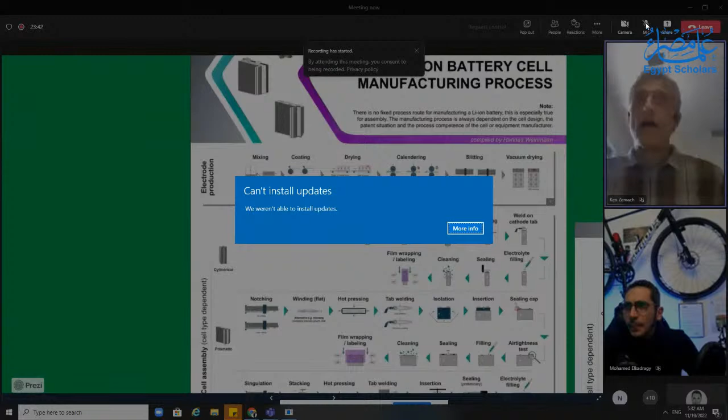Okay, so actually, let me ask you a question. Is everyone on this call probably read in enough on battery manufacturing that they know what an anode and a cathode is? Because I can explain it pretty quickly. You can do this, feel free to do it.

Okay, so you all know that a battery, you can charge it and you can discharge it. And I'm speaking in generalities, so there's always exceptions to what I'm going to say. But in general, take what I'm saying as faith. There are exceptions, so some things I say won't be exactly accurate. So a battery cell, think about your little... I wish I had one.

Maybe, let me, hold on. Okay, no, I can't. I was looking for like a little AA battery cell, right? And there's a little dot on the top that's the positive, and then the whole can that's covered is negative. Yeah, negative what? You know what, you don't need to be an electrical engineer. There's two sides. There's a positive side, there's what we call by convention the positive side, which is going to be the cathode, and the negative side, which we're going to call the anode.

And new people mix this up. Well, here's your way to remember that: some people like cats. If you like cats, you're positive about them. Therefore, the cathode is the positive electrode. That's a very nice way to remember it. Because even me, I used to make them for a long time, but then I had to remember it in a certain way, that cathode is the positive and anode is the negative. Yes, but this is a nice way. I'm not saying you have to like cats, but some people like cats. I like cats. And if you like cats, then you're positive about them. That's the positive electrode. The anode is the other one, so it must be the negative.

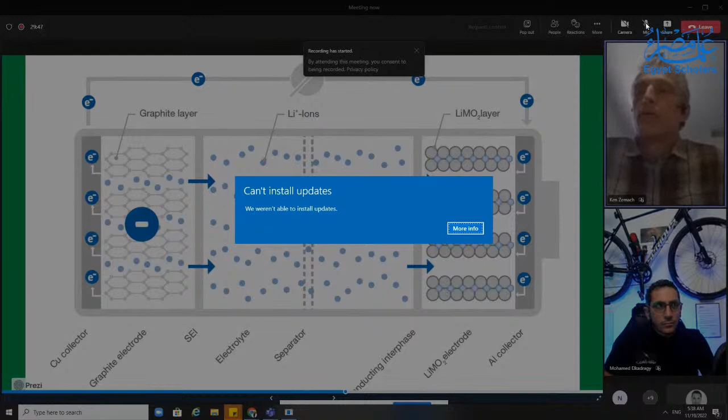So you have something in between called a separator, which you can see in the middle. A separator is usually microporous, meaning little tiny tortuous holes in plastic—usually polyethylene or polypropylene. It's plastic because that electrically isolates the cathode from the anode. So you have cathode, separator, and anode. You can squeeze those together and the cathode doesn't short circuit to the anode.

But the lithium ions can't just hop through air, so you usually put in an electrolyte. In the majority of cases, the electrolyte is a liquid, an ionic liquid. If you look up electrolyte safety data sheets, you'll see about 5 different ingredients, but there's usually like 12 because there's a bunch of trade secrets. It's a mixture of organic solvents.

Why do I say that? I'm not expecting you to know what an organic solvent is. Organic solvents are flammable—gasoline is organic, and gasoline burns. Organic solvents in general are flammable. Polyethylene is a plastic—think of it as frozen gasoline. It'll also burn, just not quite as explosive as gasoline.

So the electrolyte is primarily usually flammable, depending on the electrolyte you use. And they put some other things called salts in them to help the lithium ions transport back and forth. Think of it like a boat helping ferry people between the anode and the cathode. The salts are the boat, and the water is the organic electrolyte.

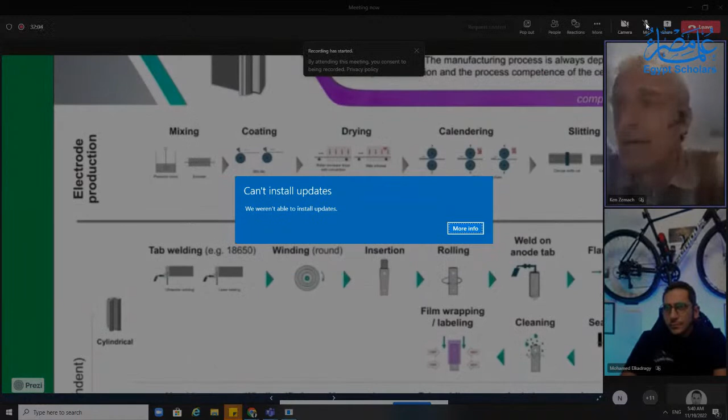So let's go to mixing. The first thing you do, let's take a basic anode. The anode is graphite, a conductive agent—you're talking very little, 0.5% by weight, 1%, maybe 2%—primarily graphite, a conductive agent, and a binder, aka the glue. Standard glue in an anode, and again, always exceptions to this, are carboxymethylcellulose and styrene butadiene, a low molecular rubber. Why two different glues?

Well, it turns out that one of them, the CMC, is good at cohesion, which is gluing the graphite to the graphite, and the SBR, the styrene butadiene, is good at adhesion, gluing that whole thing to the foil—the anode to the copper foil.

But there are other binders and other binder combinations you can use. Remember, you want to use as little binder as possible, because the only thing binder does is glue things together and take up space that doesn't help you with a battery being a battery. So you try to minimize that. You make it too small and you don't get good adhesion, and your electrodes fall apart either immediately or 300 cycles down the road. So there's a big tug of war between minimizing the binder content.

This is where batteries start to get hard. So you say, okay, Ken told me I got three things: graphite, a conductive agent, and binder. Oh, but the binder's really two different binders. So I got four things, and I need to mix them all together. Do I dry mix them? No, I need to put them on something that I can coat. So you use water, and you think, like baking a cake or making bread, just put all the ingredients together and mix them up. Except that doesn't work. You get really bad batteries when you do that.

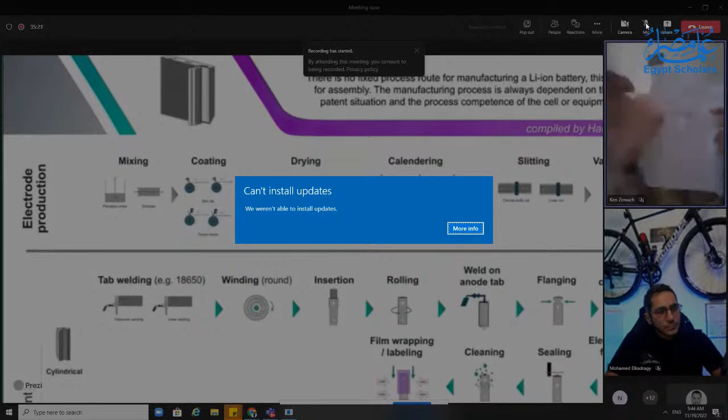Your tests will come out the same. Your viscosity tests, they'll be the same. It looks the same, a big, dark, black, gooey liquid mix, but when you get to the end cell, the performance is totally different because you mixed it in a different order. And you're going to ask why, and I'll say, look, we could go into it, but we'll never get through everything. My point is, yes, there are scientists that figure out this order works for these ingredients, and the workers on the battery line, you should just hand them their instructions and say put this in for this long, and this for this long. But I'm telling you, if those people understand why you put one in first and why you mix for a certain amount of time, your production goes better. It's that human element.

So the next thing you do, now that's the anode. The cathode, I don't want to get too detailed, but electrochemically, in a lithium-ion battery, carboxymethylcellulose and styrene butadiene rubber, those things that were soluble in water, are not electrochemically stable on the cathode side. In other words, they chemically break down because of the electric potential.

So you usually use a fluorinated binder. It's got fluorine on it, which makes it really expensive. But those aren't soluble in water, so now you can't use water as your solvent. The other thing is, if you're making a high-end NMC battery, lithiated nickel manganese cobalt is very reactive with water. So you do this in a dry room. You can't use water for that reason either.

So they usually use NMP, which stands for N-methylpyrrolidone. It's a little unfortunate that NMP sounds like NMC, which is nickel manganese cobalt, but yeah. NMP is a solvent, like diesel fuel, not technically flammable at room temperature. It's a great processing solvent, not very reactive with anything. It has a very low vapor pressure. It's great at suspending various types of particles. It's really wonderful, except it's super hazardous to humans.

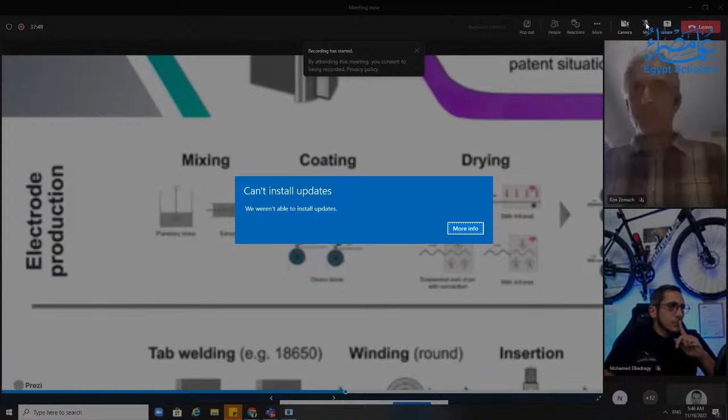Kind of like lead is great for plumbing connections, except it's toxic. Like asbestos is an amazing insulator, but is really bad for your lungs and causes cancer. NMP is an amazing processing solvent, but it's really dangerous. So you've got this really dangerous chemical in your cathode, you've got water in your cathode and in your anode. You've made your slurries, they've got their glue, they're this mixed up goo. Now you're going to coat onto your foil. Anode coats, anode starts with A, coats onto copper. Cathode starts with C, coats onto aluminum.

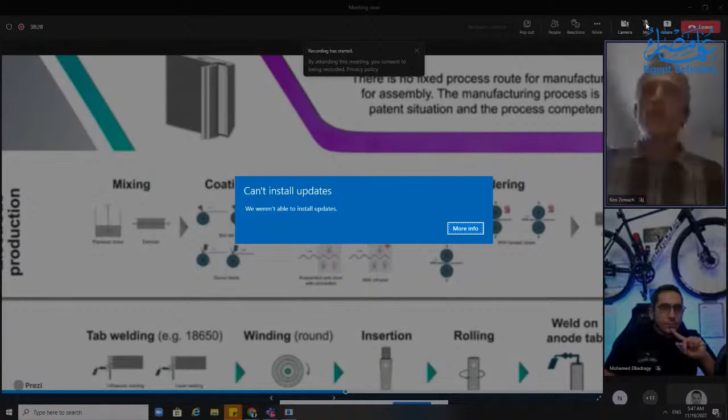There are many different coating techniques, but think of it like this: you have these slot dies, and you pump this fluid out and dispense it while the foil is going through this long system. That system takes the bare foil, wraps it up through, gets coated with a thin layer, and then that gets run through drying ovens, because you need to get rid of the solvent now that you've coated it.

When you're drying the water, you just evaporate it. But when you're drying the NMP, because it's toxic and expensive, you need to recover it. There are different recovery systems—this is millions of dollars in expensive equipment. You recover it and then re-refine it, so now you're running a chemical refinery to refine NMP, which causes birth defects. It's super hazardous to humans, so everyone's wearing face masks and respirator cartridges.

I'm not going to throw out all the problems that happen at every stage, but drying is a great example of how complex this is, and this is where science becomes super important. You think, okay, I've got this wet slurry, I've coated it on this thing, it's got a bunch of binder glue in it. I just need to evaporate off the water in my anode, and then it'll all be stuck together. And the answer is, yeah, that's true.

If you dry it too fast, though, what happens is—think of having this layer of wet electrode goo on your foil. As you're evaporating it, it's only evaporating from the top surface, not through the foil. So you have this transport problem where water molecules are moving up through, and because the binder is dissolved in them, they effectively drag the binder up with it. If you dry your electrode too fast, all of your binder, your CMC and your SBR in this case, when it's finally dry, most of it's up at the surface and not a lot of it's down at the bottom. And if your SBR is moving up to your surface, well, the SBR is what holds your electrode to your foil, so now you're going to have delamination problems.

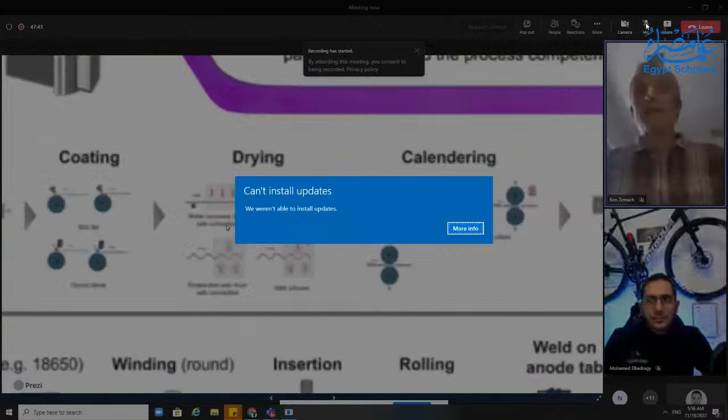The drying's complicated because, as I said, it's called binder migration if you dry too fast. But you can actually dry fast at the beginning when it's really wet, and you can dry fast at the very end when it's all stuck. There's 4 phases of drying, and you can dry at different rates.

So you've got zones in your oven, and you can adjust the different zones, and depending on your foil speed and the length of your oven and what your binders are and what the size of your particles are, you can change your drying. It's super complex. Every stage of this is super complex.

All right, so let's get out of drying. Yeah, because we could spend 2 hours on drying. Literally, I could talk for 2 hours on drying. You don't want to hear about 2 hours of drying. And I'm not trying to scare you by telling you how complex it is.

I'm trying to demonstrate that this is a very complex process. But what that means is there's lots of space for you to become an expert in an area and be super valuable when we get to the career side of this. It's not like you're injection molding a plastic thing where there's 20 million experts out there and you have nothing to bring to the table. No, we have an industry with a super complex set of problems, and you could become an expert in any one of them, or helpful in any one of them. No one person, certainly not me, understands all of these processes well.

Exactly, and this is a very important message, because people think... we will discuss it in the career part, but just a quick comment on it. The mentality, especially that we have in the Middle East, is that some people in general try to understand many things and say, okay, we will be good if we understand many aspects of the thing, how it works. There is the culture of specialization, or having just one aspect to the depth it needed. So someone who's called a drying expert, you will rarely find those people in the Middle East area.

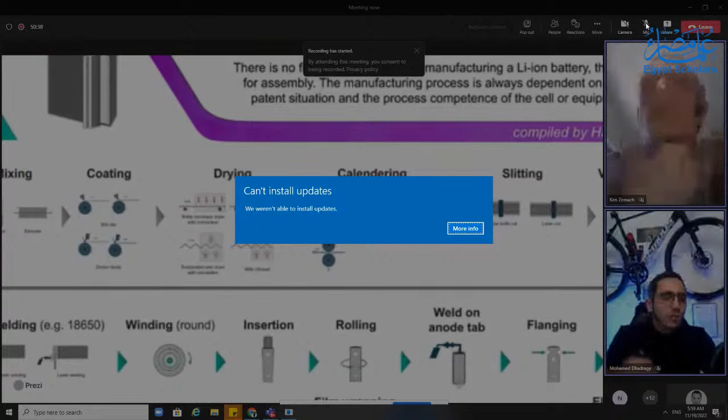Sure. So let me get to calendering. Let's get through this, because otherwise we can go on forever. That's right. Yeah, calendering.

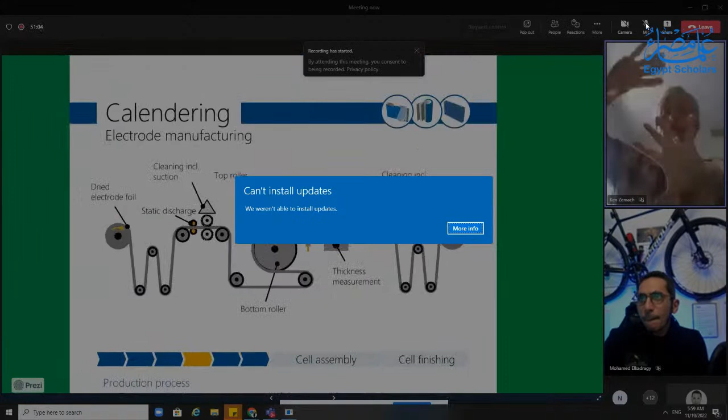Some people call it pressing. Yeah, it's the term people use. I use calendering, other people I've talked to call it pressing. It doesn't matter. It's basically two giant steel rollers that you run the electrode through. Here we have a top roller and a bottom roller. They can be heated, they can be cooled, they can be heated and cooled, they can run at different rates. Generally, you don't do that.

What you're doing is you've coated the electrode, you've dried it, but now there's a lot of pores left over because you basically evaporated out the water. So it's a little too much like a sponge. That's fine if you don't care about high energy density, but if you do want to pack a lot of energy into your cell, you need to control the thickness of those. Calendering is basically crushing it. I mean, these are big rollers. You are pressing the ever-living snot out of this electrode to a certain level of density.

Now you could say, oh well, let's put more energy in my electrode, let's crush it even more. Well, then your pores become too small and you can't get your lithium ions in and out. So there's a balance there. If you crush it less, you get lithium ions going in and out faster, it's faster charge and discharge, but you fit less total energy in your cell.

If you crush it more, now you can pack more electrode in your cell, but your charge and discharge rate, how fast you can charge, how much power you can get out, goes down. So there's a trade-off, and that's all part of the cell design. When you design your cell, that's all considered.

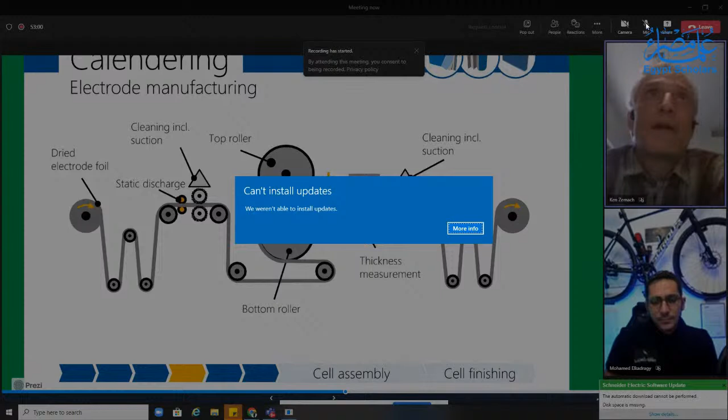So yeah, that's calendering. At the end of that, all of these steps have multiple quality control steps. Beta gauges, looking at thickness, people cutting out little pieces and doing moisture tests to make sure they haven't been exposed to too much moisture, and adhesion tests to make sure your adhesion is good to your foil.

I'm skipping by all of the different quality control steps, which are also all areas of expertise that one of you could become an expert in.

So the slitting, generally this is reasonably accurate. When you're coating, take that lower lane where it says prismatic and cylindrical, and the coating is actually in little lanes. You can do that, or if you're doing prismatic, you might just have one lane, but then the left side would be an electrode and the right side you'd slit down the center. When you're coating these things, if those edges are off, you'll have high edge problems, low edge problems, width problems. All of this needs to be in specification.

How close does it have to be? 0.5 millimeter. You better not be off by more than 0.5 millimeter, or you're in a lot of trouble, and it can actually become a safety issue.

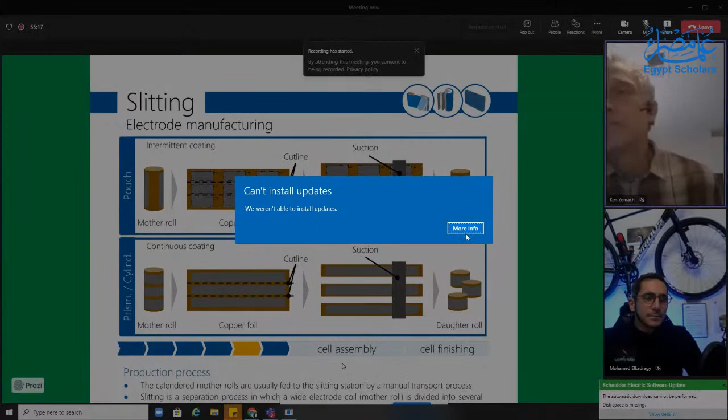So when you're slitting it, there's a little knife blade sticking down, literally slitting this. If your slitter cutting wheel isn't sharp enough, you could get a little metal burr that sticks down, and if that burr sticks down 100 microns - remember, 100 microns is 0.1 millimeter - so if you have a little metal burr that's a tenth of a millimeter long, that is a serious safety problem. You'll probably catch that in formation and aging when your cell catches fire. But really, you don't want that happening.

So we are talking about very exacting tolerances. And you might say, okay, so this goes really slowly - no, it doesn't go really slowly. These things are moving at 20 meters a minute.

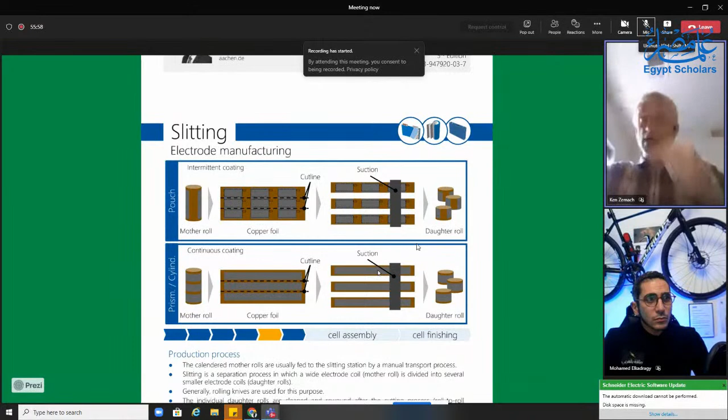And sometimes when you're slitting cylindrical cells, you could have 7 lanes. So 7, 10, 12 of these slitting wheels are slitting, and they're all getting rolled up separately. Every single slitter has to not make a burr bigger than 10 microns, 20 microns - remember, 100 microns is 0.1 millimeter. So you're talking more like a hundredth of a millimeter is really where you'd like to be on your burr size.

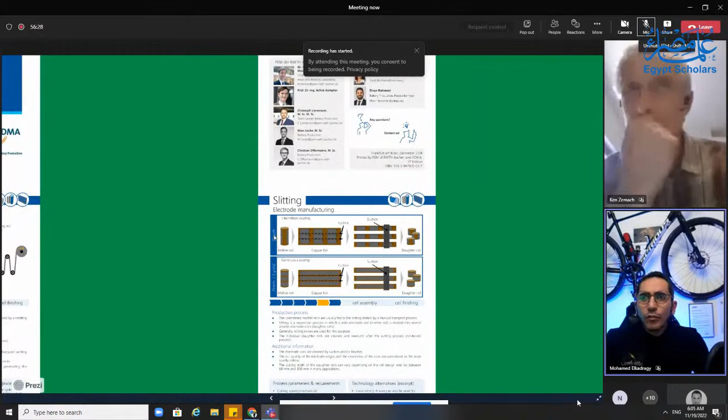I could go on about how hard every step is, but I would just like to give a very quick overview about pouch, prismatic, and cylindrical cells. For anyone who doesn't know what pouch and prismatic are, I have a picture here, and we will jump back to continue.

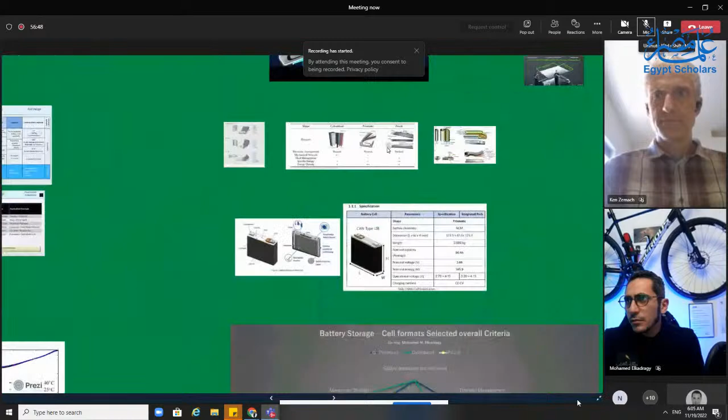So I have a cell format here - I guess I can use this one from the cell formats. So this is basically a pouch cell, the type we have for example in our cell phone. This is a prismatic cell, which is a hard case cell, and this is a cylindrical cell. This is exactly what was mentioned on the other slide - those are the 3 common types which we have for lithium-ion batteries, more or less. I just wanted to show this because it was mentioned here, the 3 aspects, and I will jump back to continue.

So once you've gotten your electrode made, which is the hard part in my opinion, here's an interesting thing: people look at all these steps, and we'll go through the cell assembly steps. When you walk through a lithium-ion manufacturing plant, if you ever get the opportunity, it's fascinating. And it's interesting because everyone seems to think that the cell assembly, from the slitting on, is the hard part.

Cell assembly is really hard, but people all sort of dismiss electrode production because you mix a bunch of stuff together. It looks like black goo. You coat it onto a foil, press it down, slit it. You're like, how hard can it be? But there's all these chemical nuances in there. People can't mentally grasp what's going on at a molecular level, so they don't think it's hard.

When you see cell assembly equipment, you can go watch YouTube videos of stackers, look up a Z-stacking video on YouTube. You'd be like, whoa, that's really complex. The thing is, we as human beings can look at that and visually see how complex it is. So we say cell assembly is really hard. It is hard, but it's not as hard as mixing and coating, because you don't get that visual feedback of what's going on in mixing and coating.

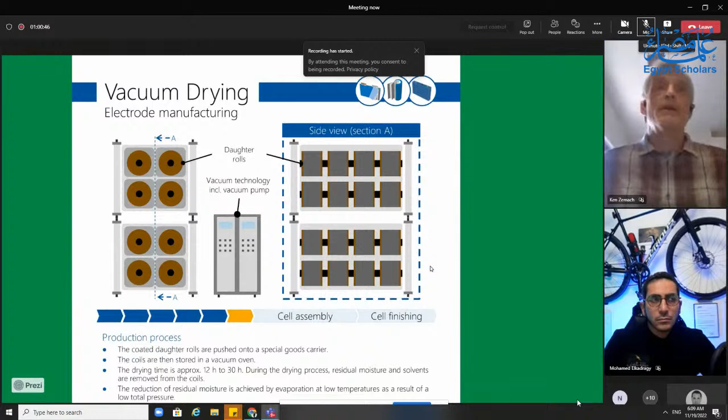So after that we move into cell assembly. Yeah, this cell assembly part will be more meaningful for people, I guess, because this is what they see in videos and so on. I guess I believe so.

Cell assembly: in a cylindrical cell, you take your anode, your cathode, and your separator, and you wind them all so that you have separator between your anode and your cathode. Imagine you're rolling it up like rolling a cigarette or a cigar—it's a spiral with anode, cathode, and separator all wound up.

You've also got to add tabs, because how are you going to connect this stuff? There are exceptions, like Tesla's tabless design, but generally on your electrode foil—copper for the anode or aluminum for the cathode—you will weld on, usually with an ultrasonic weld, a tab, a little piece of metal that sticks out. Then on the anode, that gets bent in on these jelly rolls. They're small, so it gets wound up super tight, all wrapped in separator.

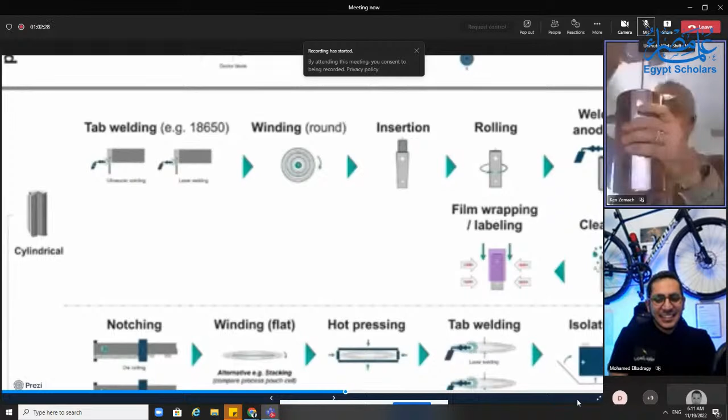Then this gets inserted into a can. So if this is my can and my jelly roll, it would get inserted. But I've got to connect it, so you'll have a stake down the center which welds your anode to your can. On the top, you'll leave it open because you've got to fill it. Eventually you weld your cathode tab to your top cap, which later gets crimped—that tab gets welded to the top cap, which then finally gets inserted and crimped into your cell.

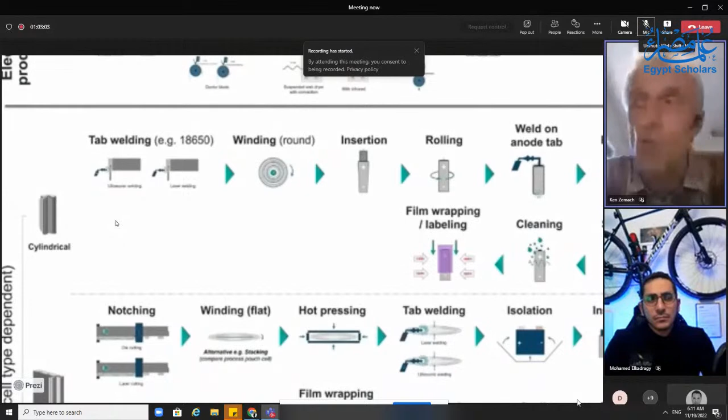Every one of these steps has yield problems: the welding has yield problems, the insertion has yield problems, the winding has yield problems, the alignment of the anode and cathode, the x-ray of the system to make sure your alignment was right—because once you've inserted it, you're blind.

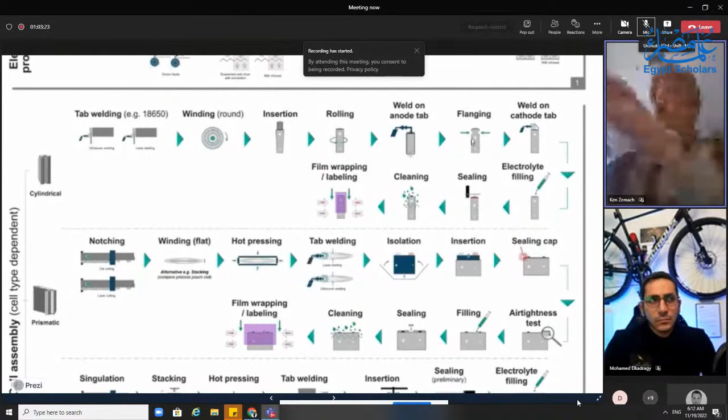Then you do flanging, I suppose. For cylindrical cells, the cap needs to sit on something, so you do grooving or beading or flanging, whatever you want to call it, where they put a little shelf in the can. You come in with something almost like a blade as this thing spins, and you put a little groove in, which is what the cap will sit on.

But before you put your cap in, you need to get electrolyte in. Electrolyte, remember, is this liquid medium by which lithium ions can transport back and forth. They don't just hop through air. Not that there's a lot of air in there, but they do need some transport medium to swim across, basically. So you put in electrolyte.

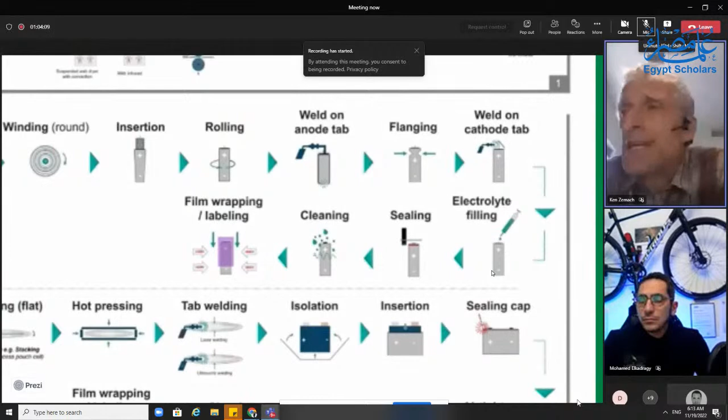Small cylinders are pretty easy. The electrolyte soaks into the anode, the cathode, the separator, because they're all porous. Happens fairly quickly. And then eventually, well, okay, let's leave it at that for now.

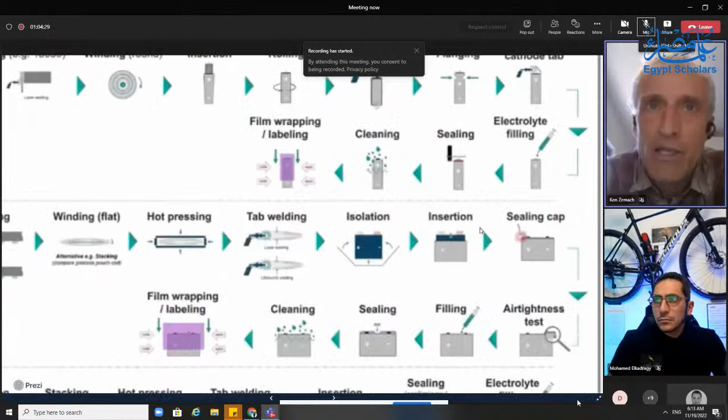For both prismatic and pouch, there are generally two ways in which what we call jelly rolls are made. Before it goes into a can or the final pouch, it's called a jelly roll, probably because cylindricals looked like little rolled up jelly rolls.

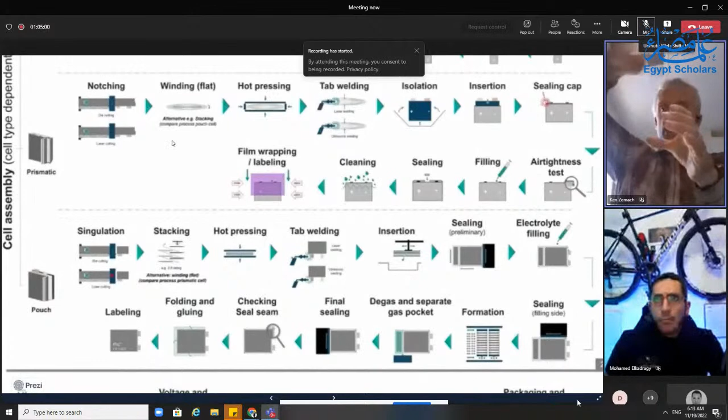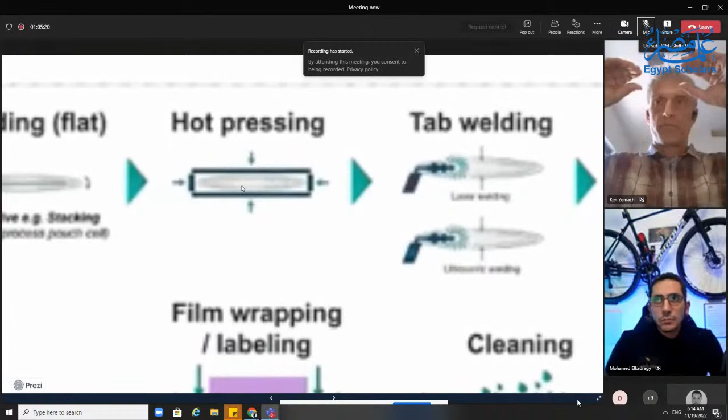One way it's done, here's where it says prismatic, you see it says winding flat. So basically you do the exact same thing: you spin up this wound assembly, and then you flatten it. You smash it down, so if you can zoom in on that hot pressing part, now it's hard to see, but you can see that when you smash it down, it's almost ovally. It's because you've collapsed this thing, it's got rounded edges. That's probably the fastest and easiest way to do it.

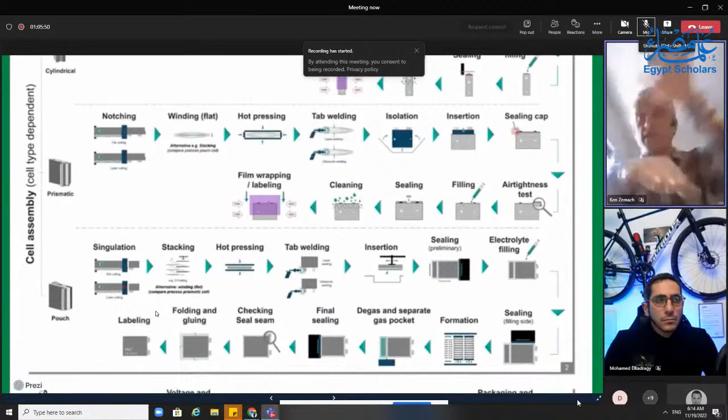The other way that people do it is what you would call stacking. He's got stacking shown by the pouch, but you can do it for prismatic too. There's two different kinds of stacking. You can do Z stacking, where your separator goes back and forth, and you place an anode, place a cathode, place an anode, place a cathode, like building up layers of a sandwich with separator weaving in between. The other way is some people will take discrete sheets: an anode, a sheet of separator, a sheet of cathode, a sheet of separator, and they'll stack the whole thing up like a sandwich.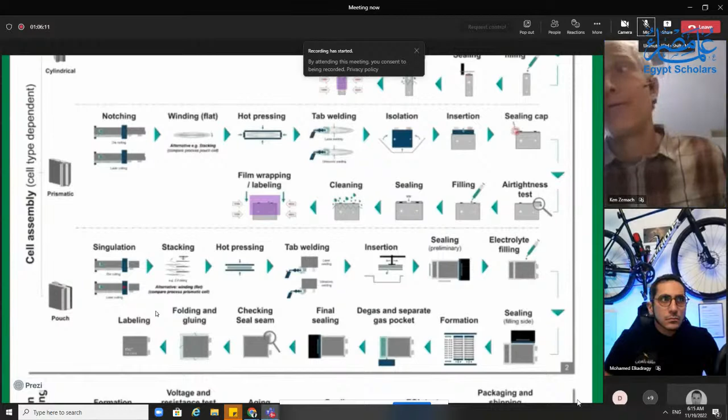Now, how hard can this be? Oh, go watch some videos. Go watch some videos of Z stacking on the internet, and you go, wow, those things are going in really fast. But here, let me go off on a tangent for a moment.

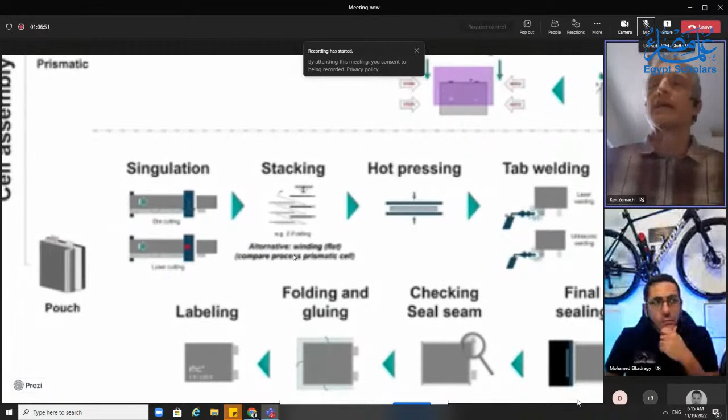You want to maximize the amount of energy in your cell because you're going through the expense of building it. So you want to fill as much of that volume as you can. There's a failure mode that I don't think we'll get into, but basically your anode needs to be bigger than your cathode, both in terms of how many lithium ions it can accept and geometrically—in other words, it needs to overlap.

So if you take a cylindrical lithium ion cell, discharge it, get in a fume hood and unwrap it, you'll see that the width of the long anode is wider than the width of the cathode. And if you take a prismatic cell, or the sheets if you were doing singular sheet stacking, the sheets of the anode are wider and longer than the sheets of the cathode. That is a safety related issue.

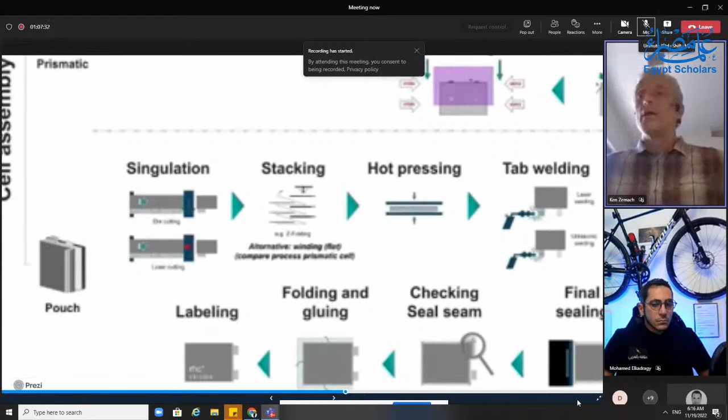And you say, okay, great, so when we stack them, we just need to make sure that everything's centered. You go watch some of those stacking videos and see how fast those sheets get stacked. Now I'm going to tell you that on a not great quality cell, the anode might be 2 millimeters wider than the cathode. So you have maybe plus or minus 0.5 millimeter of alignment on all four sides, corner to corner. And you watch these stacking videos, and it's stacking these things at sheets per second with sub-millimeter alignment accuracy.

Now, it's not done by a person, it's done by automated machinery. But if it gets it wrong, how do you know? Because that's a safety issue. You will know when the cell explodes, I guess.

Oh, wait, have I lost you on audio? No, I was saying that you might know when it's too late, when the cell really explodes. But we can still hear you, Ken.

Uh-oh, I think we lost audio. Can you guys hear me? Say something. Yes, we can hear you. Okay, sorry, I lost audio. Where did you lose me?

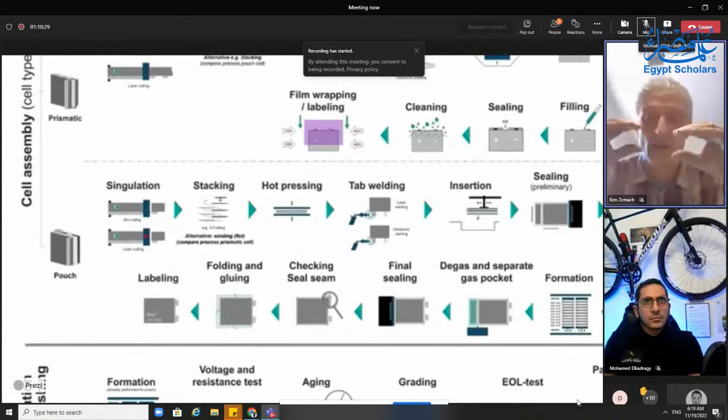So after you've made this jelly roll, sometimes you hot press it to try and get it to all stick together a little bit, but you can't use too high temperature, you can't use too low temperature. It depends what separator you're using. It's very complex. Then you insert it either into a pouch for a pouch cell or into a can, usually an aluminum can. You might need to weld it to a lid first, depending on your design.

And then you need to seal it. In a prismatic cell, you're usually laser welding your lid around the rim of the can. And if it's a pouch, you're doing a heat seal. You're not completely sealing it because now we've caught up with the cylindrical process. Now you need to get that electrolyte in, so you fill your electrolyte.

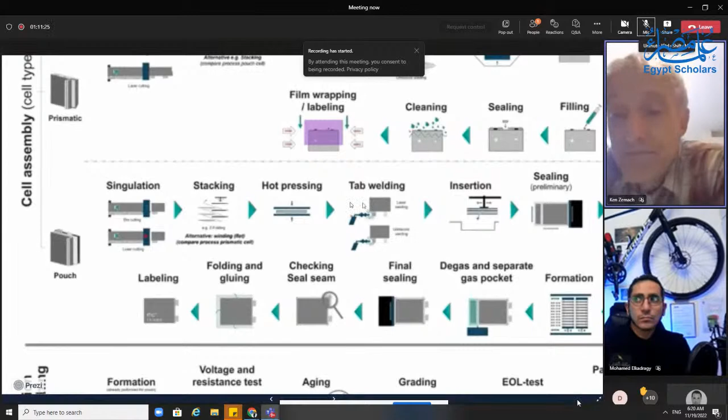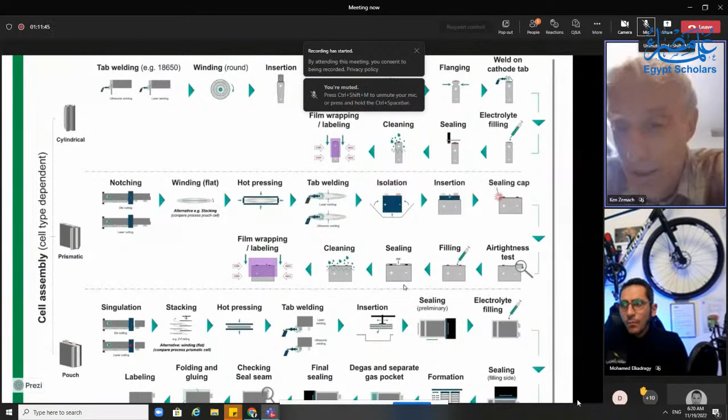Now on a small cylindrical cell, that electrolyte you put in however many grams, 4 grams, 7 grams, depends on the size of your cell. In a giant prismatic cell, like some of these big cells, you've got a tiny little fill hole. So you put in all the electrolyte you can, but you can't get in enough because it hasn't soaked in, because there's a transport problem. This is not like soaking water into a sponge, which by the way also takes time. But imagine you have a giant sponge in a package and you put some water in one part, it's going to take time to soak through.

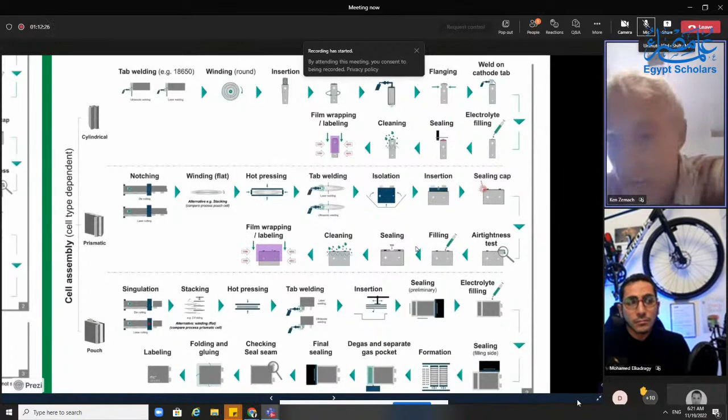And until it soaks through, you have two problems. One, you can't get your electrolyte in, you can't get enough electrolyte in because you need a certain amount. And the other problem: electrolyte filling can sometimes take 30 minutes. You pull a vacuum and then you put pressure, and you pull a vacuum and you put pressure, over and over. But remember, electrolyte is flammable, it's toxic, it's hazardous, and it can't be exposed to water.

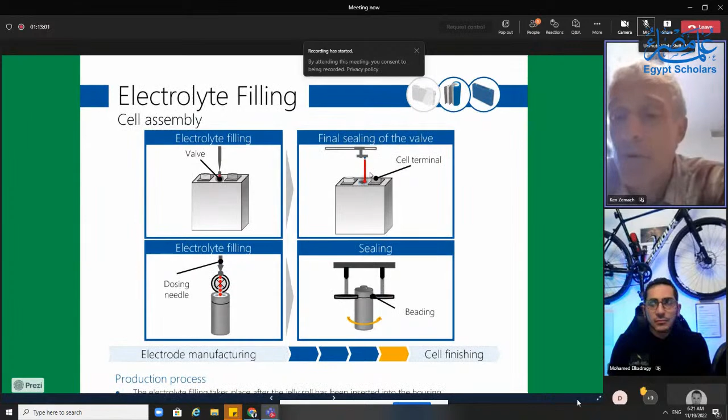So all of this is done in a dry room. So let's pretend you've gotten all the electrolyte that you want in your cylindrical cell, your prismatic cell, or your pouch cell. You say, okay great, now I can seal it up. Nope, you can't. Then usually what you do before the final seal is a pre-charge, where you charge up your cell a little bit. Depending how long, sometimes you charge to a certain lower-than-full voltage, sometimes you go up to full voltage.

And what happens is now you're starting the first formation of the cell. You've got to make sure all the electrolyte's soaked in, so sometimes soaking can take 30 hours. On large cells, you might have to wait 30 hours at an elevated temperature. Then you do this pre-charge, which is like the first stage of formation.

And what happens in that, your electrolyte does some electrochemical degradation on the anode. It creates what we call an SEI layer, a solid electrolyte interphase. Some people call it solid electrolyte interface. I think interphase is the correct term, but people use them interchangeably. There's no standard. This SEI layer happens, you can't stop it, but it also turns out to be a protective mechanism. But when an SEI is formed, you also get gas given off. It creates gas.

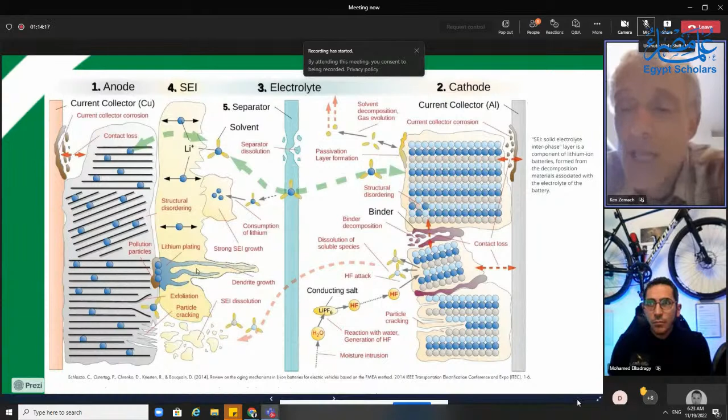The problem is if you fill your cell, seal it up, and then send it directly into formation and aging, that gas will blow up your cell like a balloon. So you have a degassing phase, which is sort of a pre-charge plus putting it under vacuum to pull the majority of the gas off. Then you seal your cell. For instance, you might put a little plug in it and laser weld it shut. But remember, you're now laser welding a cell that's got flammable material in it, and it's partially charged. So sometimes bad things happen. Let's leave it at that.

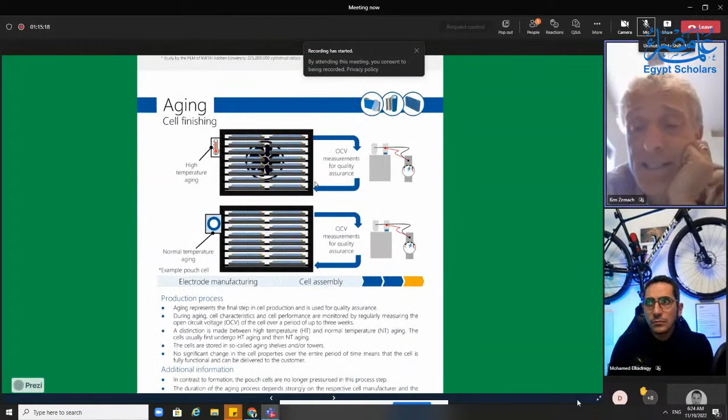Then you go into formation and aging. Formation and aging is where you're doing your initial charge and discharge cycles, because it's not really a battery until you've charged it up and discharged it a couple of times. And you let it sit to let more electrolyte soak in, and let the SEI layer, the solid electrolyte interphase layer, form. It's basically a series of very slow charges and very slow discharges. And then sometimes you let it sit for 24, 48, 60 hours at high temperature, depends.

Well, what should I use? There's a lot of trade secret in there. I don't know — what's your anode? What's your cathode? What electrolyte did you use? What's your cell design like? Depends. There is no recipe. Each company has its own recipe, but formation and aging can take anywhere from 2 to 7 days.

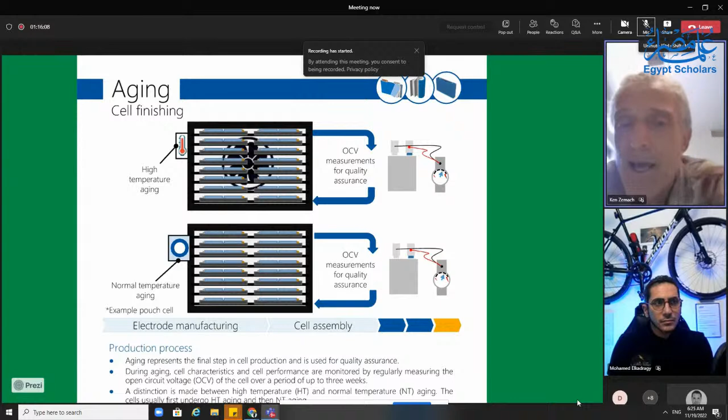And a lot of that's just letting the cells sit. But 2 to 7 days — let's say you're Panasonic at the Gigafactory in Nevada, doing cylindrical cells, not that big, and you're doing 1.5 million cells a day. Well, if your formation and aging took 10 days — I'm just making that up, it's not what it actually takes, I can't tell you — and you're doing 1.5 million cells a day, that means you are holding 15 million cells in volume during formation and aging at any given time. That's a lot of space. That's a lot of energy. That's a lot of time, and that is really expensive.

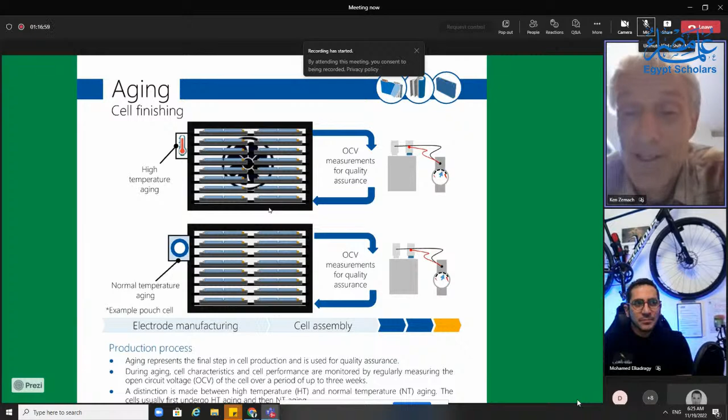So energy-wise, usage-wise, the real energy killers are the ovens when you're drying your electrode and the formation and aging process. Those are real energy killers, which is one of the many reasons people try to site these factories in areas with really cheap electricity. Because the electricity you use to run these operations and the dry rooms and all that — I think the third largest electricity usage is probably the dry room.

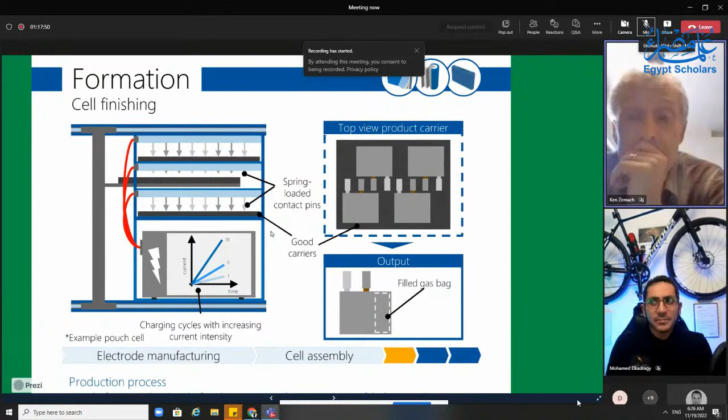Dry rooms themselves, just dehumidifying — of course you use less electricity to do that in the Middle East. That's for darn sure, because your natural air is drier, so it costs less to dehumidify it, right? And the good thing is there is sun, so you can build a solar power plant beside your gigafactory. That's 100% cool, huh? Yeah, 100%. It's like a self-licking ice cream cone.

So once you've been through formation and aging, there's a bunch of testing. You might wrap your cell, you might put a sleeve around it — some people don't put sleeves around it. You do a final testing and inspection. There's all sorts of quality control steps here as well before they go out to either your customer or your next process line. You weigh them.

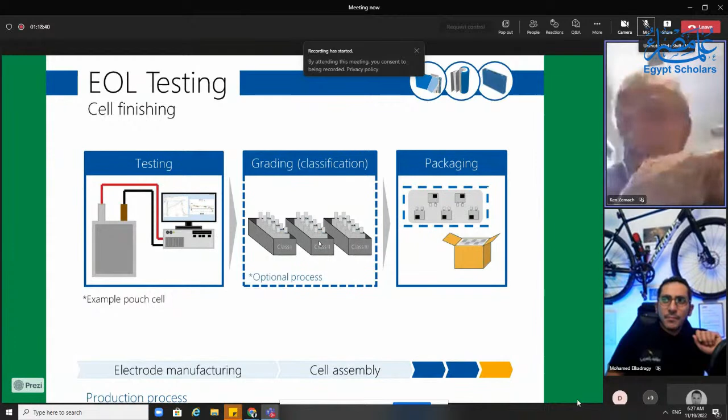Was there enough material? All these cells get weighed multiple times, so you confirm you got enough electrolyte in, because you know how much your can weighed, you know how much your jelly roll weighed. You confirm the voltage is right. You confirm there hasn't been too much self-discharge, which would indicate a short inside the cell. You look at the internal resistance. There's a million things you check, but you've been checking these things all along. I've completely missed all the quality steps, which as an ex-quality guy is probably an egregious foul. But we could spend 3 hours just talking about quality checks.

And then you package them up and you ship them. I wish it was that easy, because it's not.

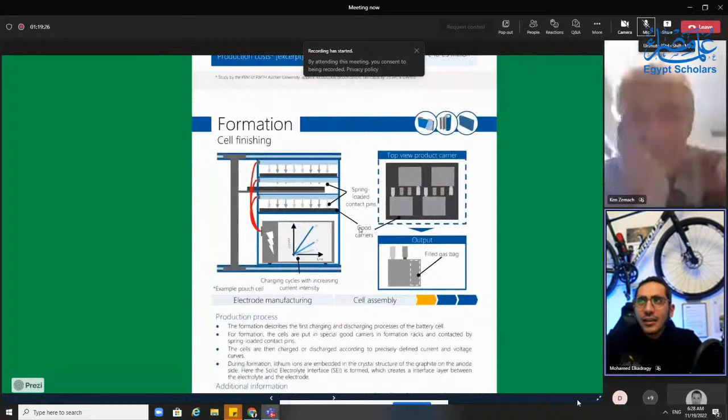Yeah, it's not. But before we ship them, I'd like to follow up on something — because once I heard that from you, it was funny to hear that formation is the phase where a lot of gigafactories get burned, or a lot of cell manufacturing facilities get a lot of fires in this phase, right?

So if you have a defect in your cell that didn't get caught earlier, maybe a little burr sticking out, and during charge and discharge and formation aging, things swell and relax, swell and relax, and you get that little short, you can get a fire. Now you could say, well, I'm going to have great manufacturing, I'm not going to have a cell defect, I'm not going to have any fires. That's what everybody tells themselves.

Everybody gets battery fire. The thing is, if you accept that, you don't have to like it. You obviously try to never have a fire in formation and aging. You try to never have a fire anyway.

But formation and aging equipment is set up for this. There's inline self-detection when there's a voltage short and it pulls things out, and there's robots that come in with firefighting equipment and robotically spray it down.

Good formation and aging equipment is basically predicated on the assumption that at some point, maybe once a year, maybe twice a year, you're going to get a fire. And the key is to just not lose your whole factory.

There have been many factories over in Asia where entire factories have burned to the ground in the early days of lithium-ion batteries. And then we learned, and we put in firefighting equipment in the formation and aging equipment, and it's fine.

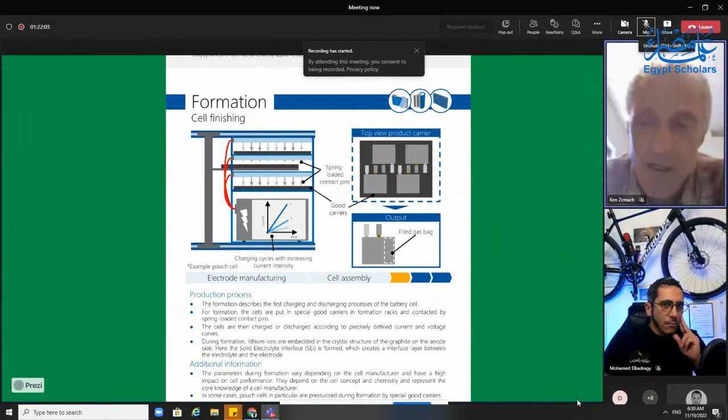It doesn't need to be a reason for panic. I mean, if a house catches fire, yeah, you should run out. But the firefighters run in, right? Because they know how to deal with it, because they're firefighters. That's what they do.

Yeah, but we have to emphasize here that we are talking about the level of Tesla, Panasonic, and LG Chem. This is the Mercedes manufacturers, huh? So in this case, the firefighters are trained.

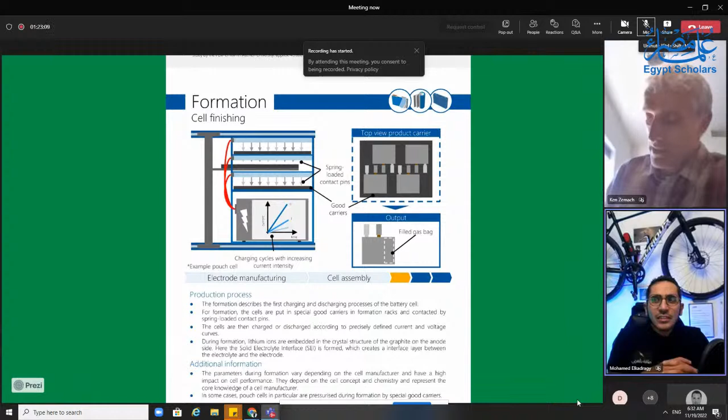In this case, you can fight it, in this case you can do it. But unfortunately, we see in many countries, especially in Asia, India, and this region, there are disasters happening because of manufacturing problems and people not dealing with fires in a good way in the facilities, or thermal runaway along the street. But I guess I wanted to emphasize this formation point because I remember it was one of the things I had in mind since I heard it, that it's not an easy phase to be done even.

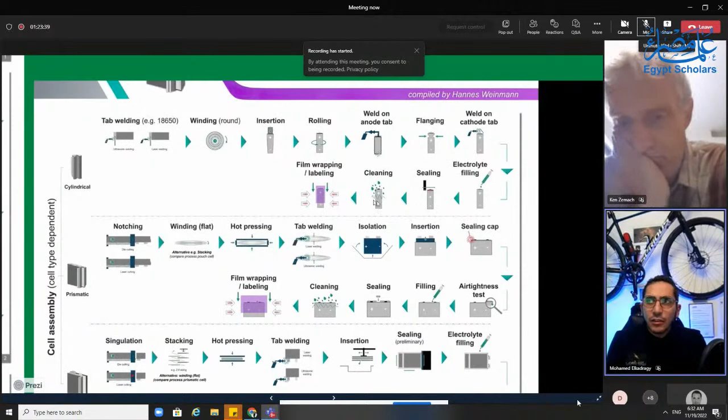And the second question which I have is that some people, I heard, get dry cells from a manufacturer, maybe an Asian manufacturer, a Chinese manufacturer, and they do just the last phases. So is it feasible to do this? Just to relate my question to the process, they just get, I guess, to this phase here as a cylindrical cell, and then they do the electrolyte filling and the formation and everything, sealing, cleaning, and so on.

Sure, yep, there's companies that do that. It depends how you split up your manufacturing. There's companies that start at cell assembly and they just get coated electrode rolls from a manufacturer. It depends how you want to set up your operation.

I do want to say one thing just so I don't get misinterpreted. I am not being flippant. I'm not being casual and cavalier about cell fires.

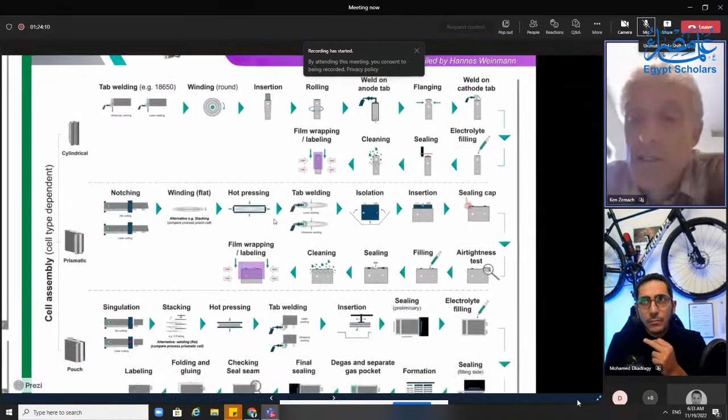When a cell fire happens in formation and aging, and it will happen, it's just a fire, you deal with it, but you are trained to deal with it. The fumes given off by a burning lithium-ion battery are super dangerous. People dealing with it are wearing full face mask respirators and protective equipment. If you have an e-bike or e-motorcycle and the battery catches fire in your house, do not breathe those fumes. That is not a standard fire.

So I want to be super clear. I'm being a bit, oh don't worry, it's a battery fire, happens all the time, formation and aging - well yeah, asterisk, if you have the right equipment to keep yourself and your coworkers safe while you're fighting it. I'm not saying it's a battery fire, don't worry about it, just go pick it up and roll it up in a blanket. Because if you breathe those fumes, you can permanently damage your lungs. Permanently. There's no hospital that can do anything for you. You will have breathing problems the rest of your life. Super serious, that's the point.

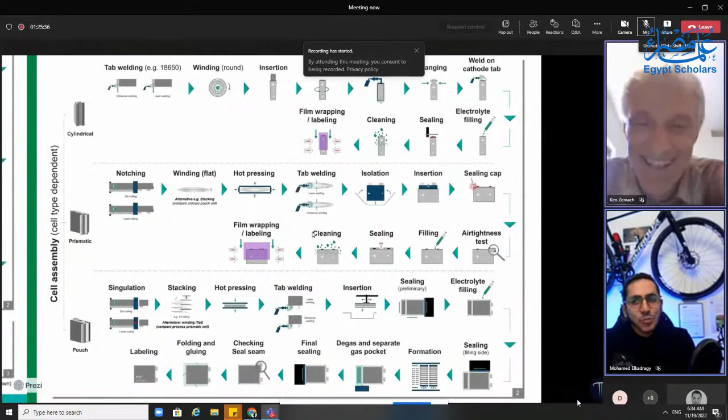Thanks a lot for emphasizing this, because I always say if you see white vapor come from outside of the battery, you have to run fast. If it's black, you have to run, but not very fast. So this is my code which I always use. If it's white, you have to run very fast. If it's black, you have to run as well, but a lower speed is allowed. So people really have to have the right way to do it, and in factories, in gigafactories, this will for sure happen.

I just want to ask about this cleaning stage, because I guess I did not exactly understand how important it is to clean the cell. Does it have to be done accurately, or just - there's the cleaning, the washing. You remember, you usually get little bits of electrolyte residue on the cell, and so you need to wash those off. They'll literally wash a cell in water, sometimes water and detergent.

It depends who's buying the cell, what level you clean it to. It depends if you're self-consuming it into a module via robots and how much you need to clean it. Electrolyte residue can be corrosive. Well, first of all, it's hazardous to humans, so you want to wash it off. How much and how you clean it really depends on who you're selling it to and how they plan to use it.

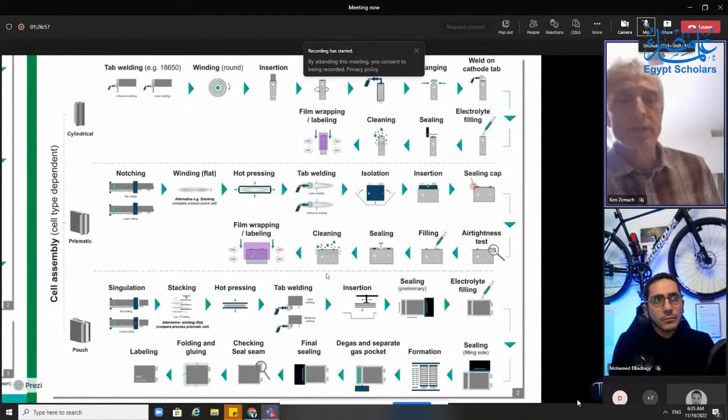The general assumption in a battery factory, even on a finished cell, is you never handle it without gloves. You probably could pick them up with bare hands and be fine, but is that always true? So you have a standard - you just use gloves.

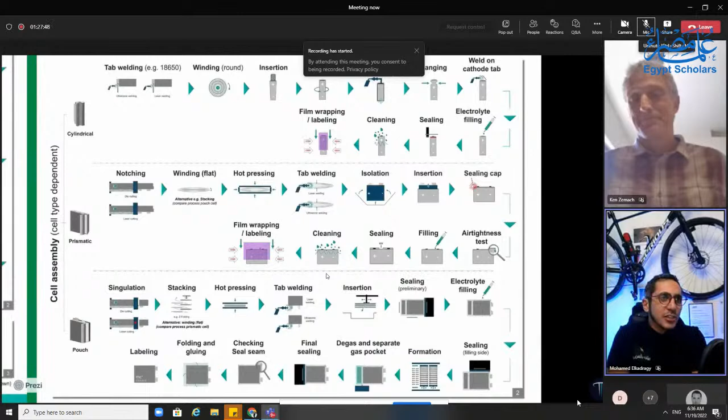I myself have picked up an 18650 and shorted it on my wedding ring, because I wasn't thinking, because I was careless and wasn't following the rules. Yeah, it happened to me with a busbar before, so even a busbar can short a module, and then you will never recognize it, because you think it will work. As you mentioned, people think, okay, I'm a good producer, I will not have fire in my formation or aging, or in my battery. But a good battery design or a good factory design will put a probability that I 100% will have a fire.

It's the same with handling a battery - I see myself, especially in the Middle East, people really handling lithium-ion batteries like they do with lead-acid batteries, without any self-protection, and they think it's an easy thing to deal with. And this is one of the main messages which we have to get through here, that it's not easy to deal with them.

Don't take this on the Middle East. This is everybody's problem. Yeah, that's correct. This is not a Middle East problem. This is an America problem. It's a Canada problem. It's an Africa problem. It's a Europe problem.

And people will generally learn more and more. But it's a problem for everybody. I totally agree, I'm just giving an example of what I'm seeing, because we have a peak of EVs infiltrating the market, and people are exposed to batteries, and they want to know what is inside it.

But let me first thank you for this crash course about manufacturing. I guess what you shared with us is worth a lot, really worth a lot, to have such an overview of manufacturing step by step for different types of cells. People working in the industry will know how valuable it is to share such knowledge.

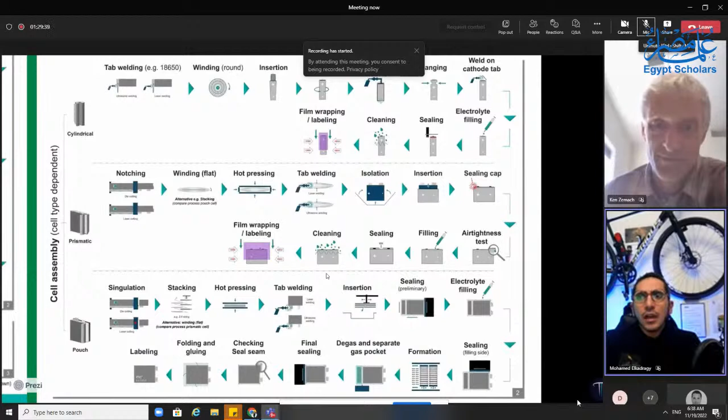I guess the main message I get out of here, I was writing really what you are saying as a note, is that accuracy plays a major role. It's a very energy intense process. It requires very high capital investment to be done. And it's not enough to have the right equipment, you need to have the right people running it, and you've given us many examples. It takes time to learn, you could have the right equipment but people who don't know the process.

This is why I have yet to hear of a gigafactory getting set up that wasn't complete chaos for the first year. Yeah, it's just the nature of the beast.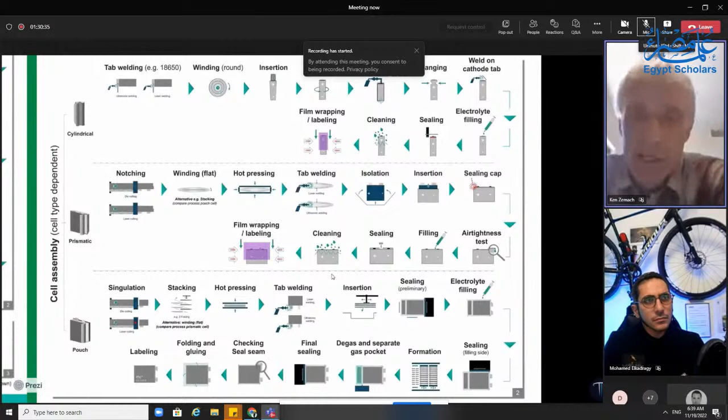I would say the other thing is, any one of these steps, and I've skipped by steps, right, any one of these steps is a 2 to 3 hour discussion. Laser welding, I could go on for 2 to 3 hours on all the problems with laser welding, lidding a can, literally.

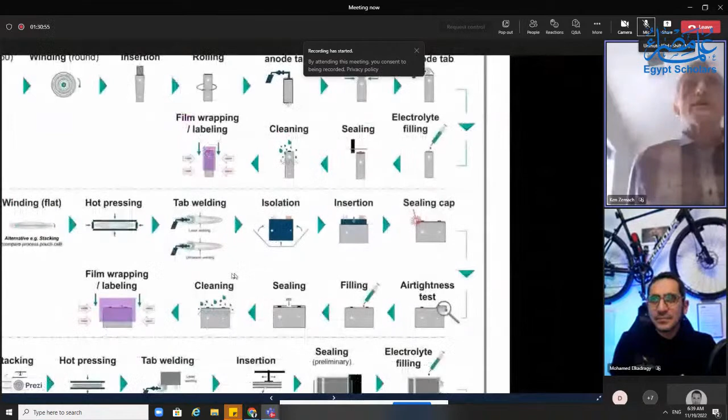But this gets to, if somebody's there saying, I hear that there's this huge job need for people in lithium ion batteries, I'm an engineer or a scientist or an operator, someone who does assembly, what do I need to learn to get into this? The answer, and you're not going to like this answer, is: you should know the generalities, things like talks like this. But if you're an engineer and you want to be a process engineer, you're going to have to specialize in something. It could be laser welding, in which case laser welding aluminum is a science unto itself that has nothing to do with lithium ion batteries. It's just a process, resistance welding, ultrasonic welding.

Ultrasonic welding, the battery industry did not invent ultrasonic welding, they just happened to use it, right? Roll to roll processing, the battery industry didn't invent that either, the paper coating industry invented that, right?

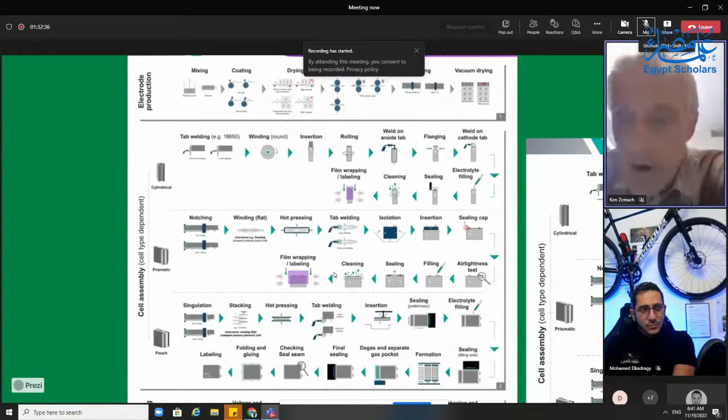Mixing and some of the other stuff is a little bit more specific. Formation aging is definitely very specific to batteries. But as a great mechanical engineer, you don't need to know cells, you need to be a great mechanical engineer. Or as a great chemical engineer, or a process engineer, or a quality engineer. I'm using engineer just because that's what I'm most used to hiring, but I've also hired technicians and operators.

I guess let me just run with that and say something about what I've looked for when I hire somebody, and some of my frustrations. I'm going to talk about some of the higher education positions, but I'll also go down to the entry level stuff.

So when I'm hiring somebody to be a chemist in a lithium ion battery company, what I actually want the most is for them to be a great chemist. And that has nothing to do with batteries.

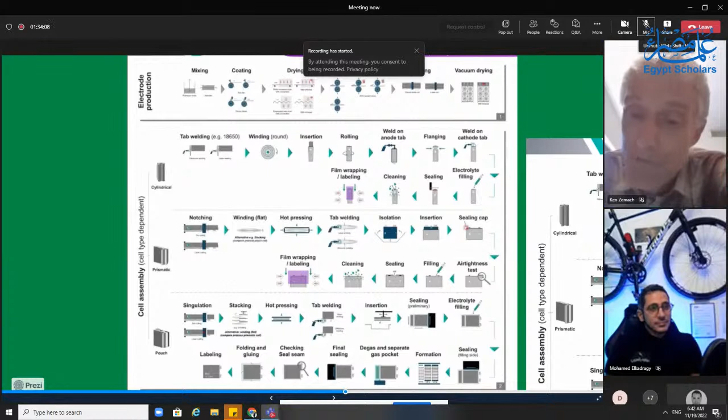So here's a little tip if you ever interview with me and you're a chemist: my first question is, go to the whiteboard and draw the periodic table of elements from memory. Usually you get some surprised looks. I certainly don't expect anyone to draw the entire periodic table from memory, but if they're actually a chemist, they should be able to get the first few rows. But I'm a nice guy, and usually they'll say something like, well, we weren't required to learn that. And my thinking that I don't say out loud is, I don't care what you were required to learn. Do you love chemistry? Because if you loved chemistry, if you're a chemist because you love chemistry, you would have memorized a couple of rows just for fun.

But okay, I can understand, maybe I'm not going to throw out an interview because of that. So then I say, okay, that's fine. Then go draw the shape of the first 3 or 4 rows of the periodic table of elements using electron orbital theory. And that they should know.

And so when I interview a chemist, I don't give a damn if they know lithium ion battery chemistry. I can teach them lithium ion battery chemistry. If they're a great chemist, they can learn lithium ion battery chemistry. If they're a great chemist, they can learn anything. But if they've just studied up on lithium, how an anode and a cathode works, I'm happy for them - it makes my job easier. But what I really want is a good chemist. If I'm hiring a chemist, I want a chemist.

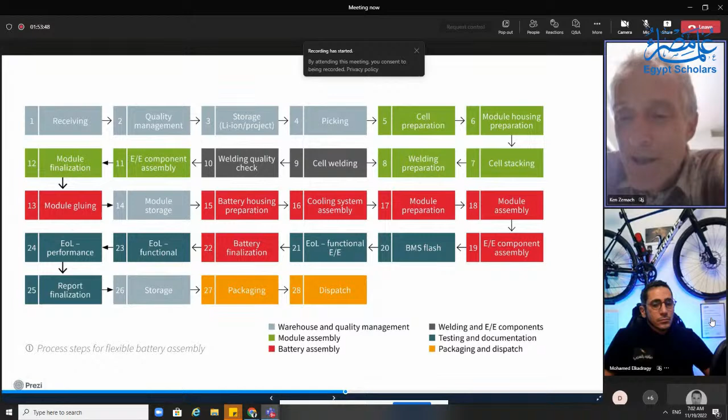I did hear an interesting quote in a podcast I was listening to the other day, though, when somebody was, it was a woman who was doing electrification projects in Africa, and she said that one of the village chiefs said to her, 'Today we spend our money on batteries to give us light. Before, we spent our money on kerosene to give us light. But either way, they're still taking our money.'

And it was an interesting perspective, because I think this is where you're going with this. How do you keep the money local? Right? I mean, we can all agree that EVs are better than gas cars. Sure, why not? Right? But there's that urge to get local industry. It's not just who's making money off of it, but how do we create a culture and an economy that's self-sustaining? Keep the money local.

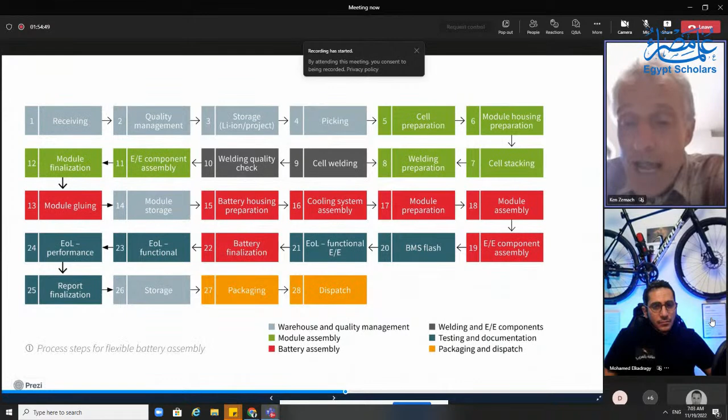I mean, at least when you buy batteries and some solar panels, even if you didn't make the batteries and the solar panels, now you can at least not get charged for gasoline and kerosene all the time. But she was right. You're still giving somebody else your money.

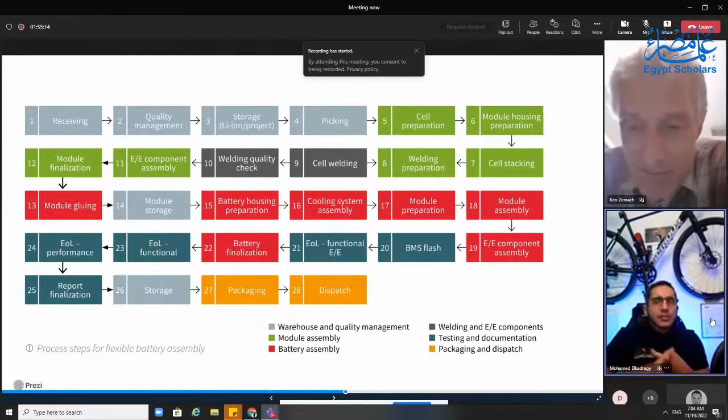That's correct. I would like to get back to the point of India, because you raised a very interesting point which we had in the last seminar. There are two points, one related to Palestine and one to India. Let's comment on Palestine first. You gave a very good example of people living with very limited resources, still able to produce energy while surrounded from everywhere. There's no excuse, and actually they are heroes for doing this, from my perspective.

The second point, India, people are saying - we had a discussion last week about some projects, namely in Egypt, and the students were saying why don't we do this, the people are doing this in India. My comment was that you said this because you don't know what is happening there. They just saw that there is a rise in use of EVs and so on. But I didn't share this at the time - I just Googled the news: EV fire rises in India, and there's a restricted policy. India EVs play hell with the government.

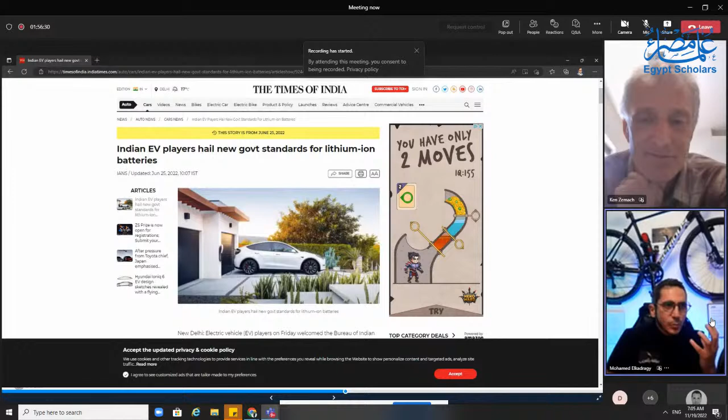There's a lot of things happening in India which we have to learn from. As you mentioned, India is very near to the Middle East culturally and environmentally as well. But people are just selling this out - maybe they're not aware, and this is part of this work, to make them aware - or maybe they're taking for granted that the problem will solve itself. But what's happening on the ground is that whenever you play around with something like a lithium-ion battery, which has a lot of energy inside it, if you don't treat it correctly, you will run into the same problems.

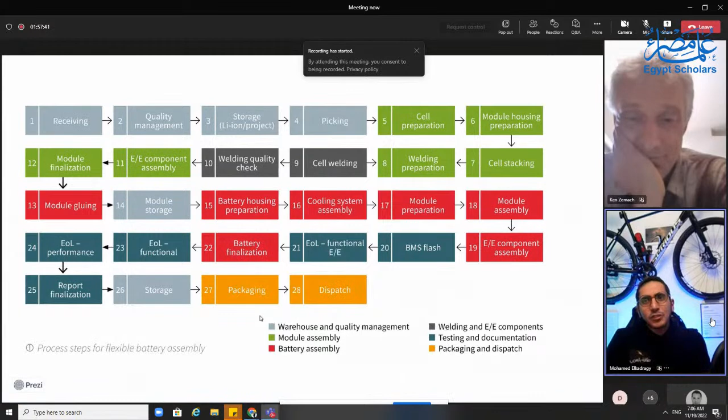People think it's easy because I have the cell, so I can go from cell to module. Today we've learned about cell manufacturing challenges, but there are still a lot of manufacturing steps from cell to module - maybe we can do that in the next seminar, because it will take a lot of time. But this is the main message we want to deliver, and I'm very happy you highlighted this. I totally agree with your point of view, and there's still potential. We're not saying things are closed or impossible, but from my perspective, people have to know what they're getting themselves into, especially investors and technical people. It's not just doing this and having a battery manufacturing industry.

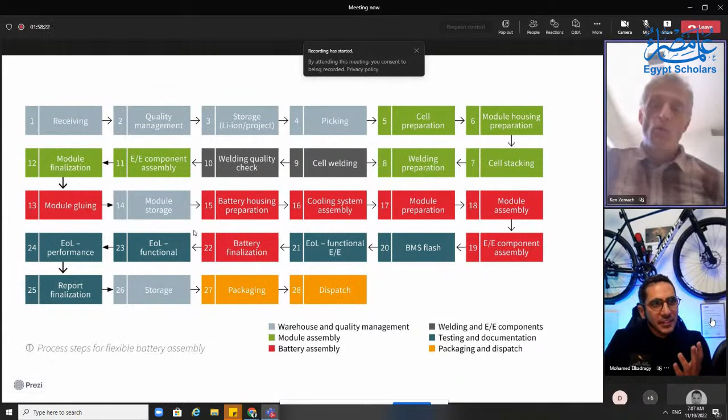Well, and there are other places - remember, we just talked about cell manufacturing. Then you're talking about module and pack, which could be just a module if it's an e-bike or an e-scooter, or a bicycle conversion to electric to get people to travel 50 kilometers to town. Or maybe that same battery pack can take in solar power, with power electronics designed to be safe across varying voltage inputs.

But there's also the other end of it, which is the raw materials. It doesn't take too much Googling to figure out there aren't enough lithium mines, not enough cobalt mines - these things take lots of time, lots of money. We're talking 5 years, $1 billion kind of thing. But the geography of the Middle East really lends itself towards a lot of that. For instance, I know people had said Afghanistan was the Saudi Arabia of lithium. Now, I don't know if that's true or not, and obviously doing business in Afghanistan might be a little difficult right now - well, certainly for somebody like me.

But there is cobalt in Afghanistan, and tons of lithium because of that type of environment. Where's lithium? Bolivia - dry environment. Western United States - dry environment.

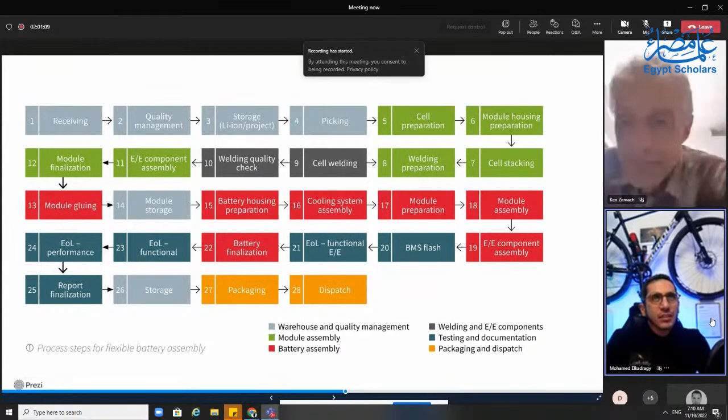I guess the opportunities are there, but there are some barriers as well. I believe, from what I have seen, people still take things for granted. But as you mentioned, it could be that we are sitting on treasures and never know it. I remember Turkey just announced they found a big stock of lithium-ion battery materials, but I guess this is a topic by itself. Still, we can explore the opportunities, and hopefully...

I would like to take a commitment from you to have a follow-up seminar. Sure, we can, because I guess we are now about 2 hours. I don't want to push a lot on this.

So this time we probably won't be able to have a lot of discussion about the post-cell things, like having a module, a pack, and a system level. We'll leave the audience to digest the information we shared about cell manufacturing and come up with questions. The career part was also very interesting. So if you have any final comments, please give them to us, or otherwise.

But before the final comments, we just need a commitment for the next seminar—this is very important. Sure, sure.

Okay, I'm happy. There is one question as well in the background, just for the info. Do you know what the question is? Because they have to ask. I don't know it—he just raised his hand, but I cannot unmute you, Ali. I guess you have a problem in your settings, so please write the question in the chat.